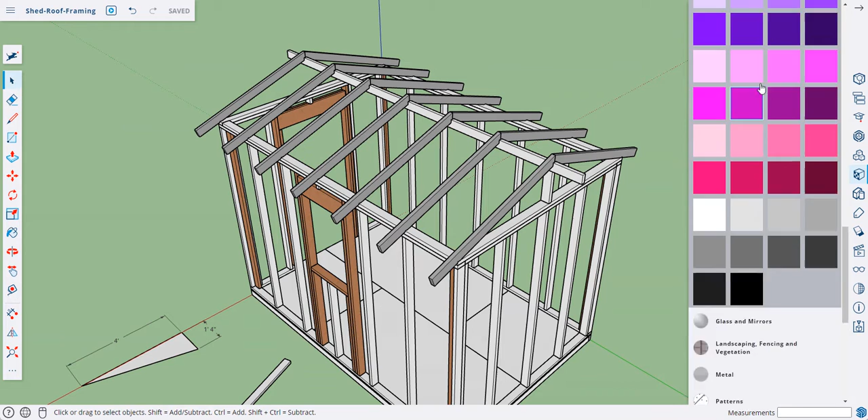Let's just close this color box here, and let's do a fascia board on the sides first. Fascia boards are usually put in horizontal and vertical on here.

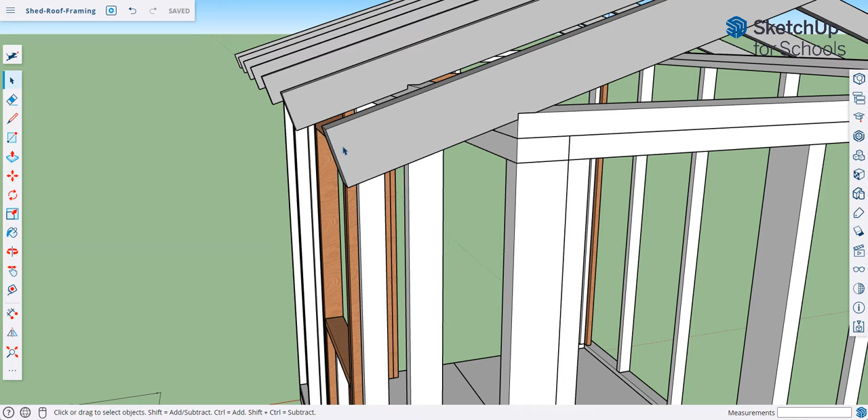So we're going to trim this rafter, and I don't need to trim all of them, just one of them. I'm going to select this and edit the component, and then edit a group first, then edit the component. Then you can see when I change this, everything else here will change.

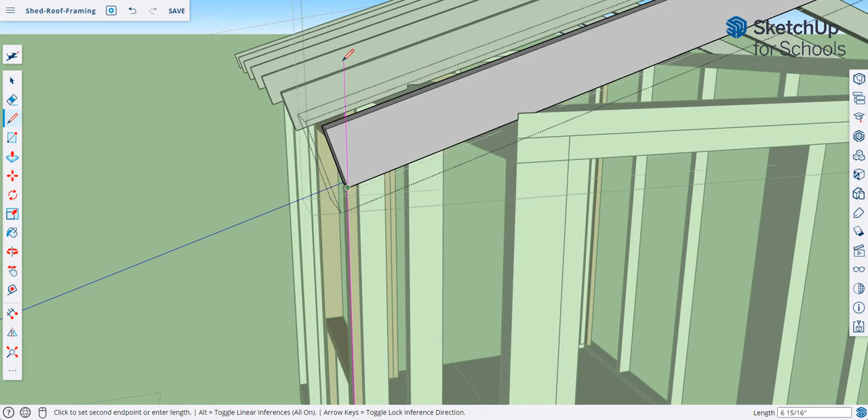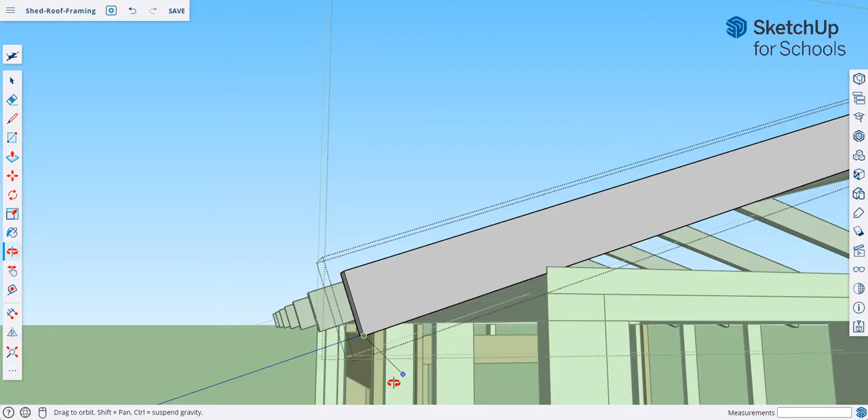So what we're going to do is draw a line from here going up on the blue. Let's see the blue axis. You can also accept parallel, but we really want the blue axis to appear. If you don't get the blue axis, parallel on the edge would be fine. You can get the blue axis if we go and look at the sky, I guess. Blue parallel. It's a little bit difficult when you can't. There you go, we want to just parallel to the stud.

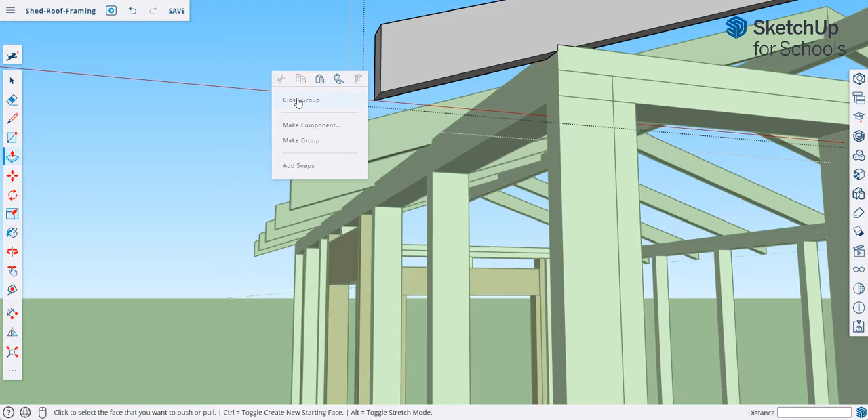Press your shift key and then go up until you touch the edge. So I drew a line here, and then all of these copies also had a line. We're now ready to push this up, and you can see everything else was trimmed out. I'm going to close the component, then close the group.

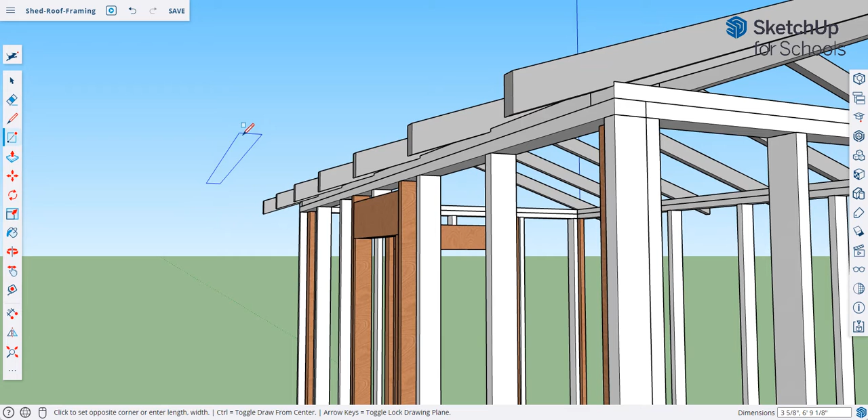Now we're going to add your fascia board, and it's not a 2x4. It's really a small piece of thin board, so we can just draw it up here in the sky, as long as it's on the green axis. If you can't do the green axis, you can probably do it here on the side, like that.

So we're going to do 0.75, so it's not even an inch thick, by comma 7.5. So it's really a 1 by 8. Okay, so that's a 1 by 8, 0.75 by 7.5.

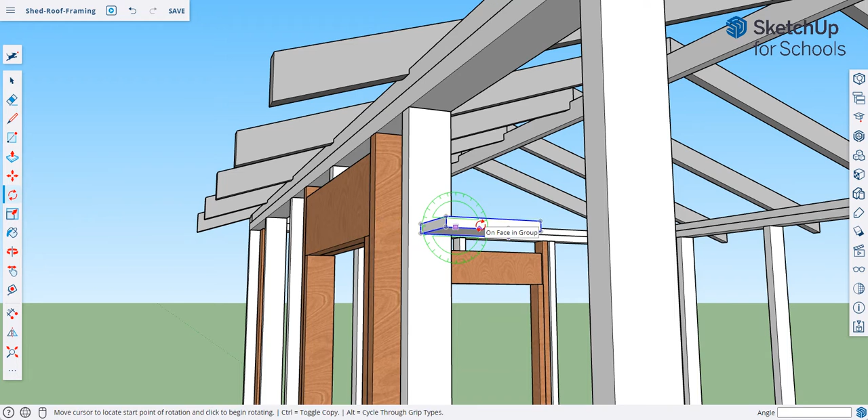Press enter. It doesn't matter that it's sloping down, we're going to just make a group out of it later. Then triple click and make it into a group, not a component, but a group. And we're going to rotate that, making sure it's rotating on the green, so it's vertical.

And then we're going to move this from this corner. We can just move it here for the meantime. There you go. And then we're going to extend that from this edge to this edge. So let's just edit the group again.

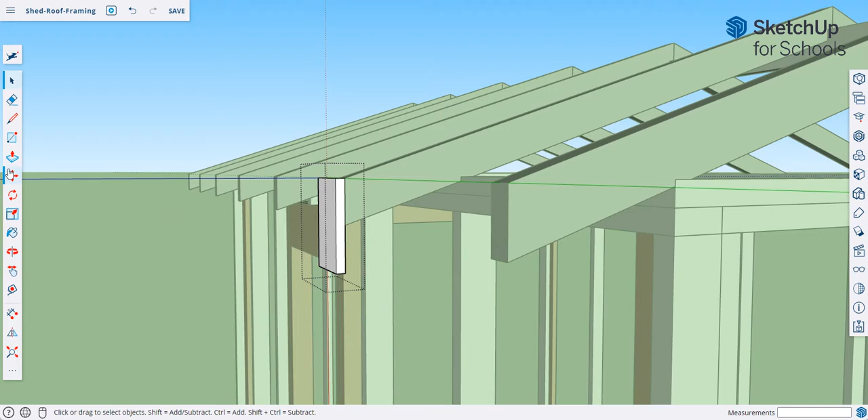And we're going to extend that up to here, and also onto this other side up to here. Now we're going to also extend that here, but we're going to create blocks first. So that's the fascia board on the right side, I guess.

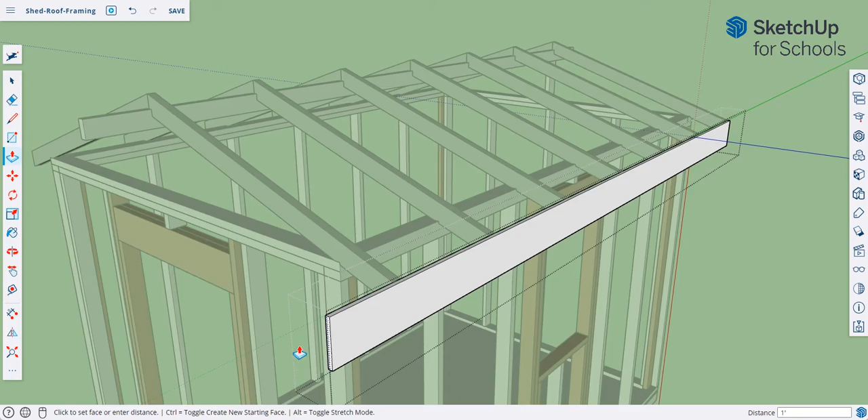Before we can continue, we are going to extend this 12 more inches. So extend that and then type in 1 2 on your keyboard, and we're going to do the same thing on the back. We're going to click this and extend that 12 inches. There you go. Okay, and then we're going to close the group.

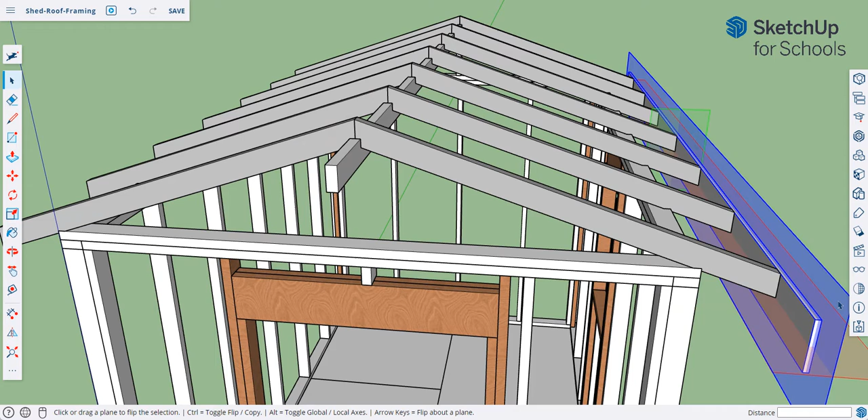We're going to use mirror, so we have one on the left and right. We can select the midpoint here, but we want to drag this blue all the way to the middle here, so that we would have the same copy here on the left. Make sure you press Control so you don't lose your original. Right click, just select. Now that's the side fascia.

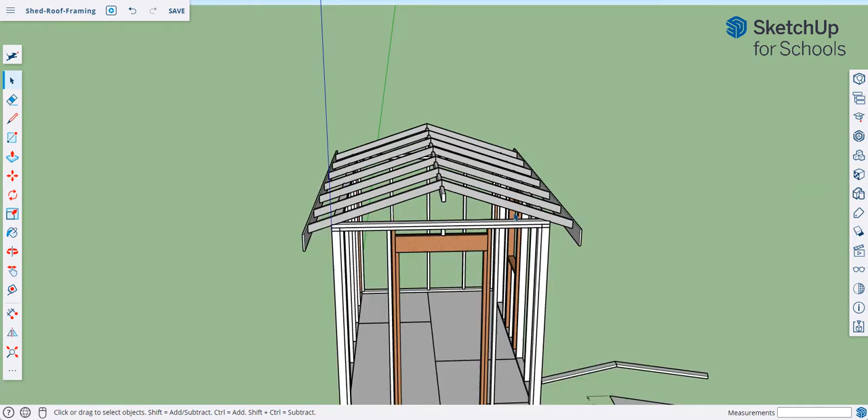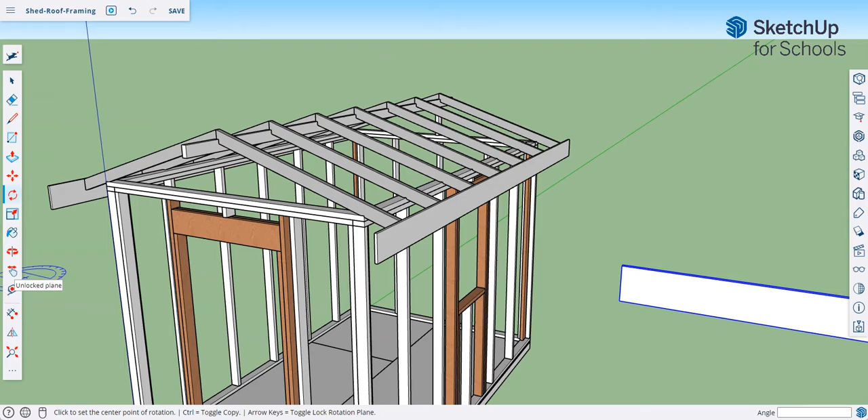We're going to now do the front fascia boards, using the same board. So we can just make a new one, or just copy this. We're just going to copy it, and rotate that so it rotated on the top like this, making sure it's now parallel.

And then we're going to move that and put that on the very, very top of our front board here. Okay, and we put that there first so that we can match the angle, because we're going to do another rotation.

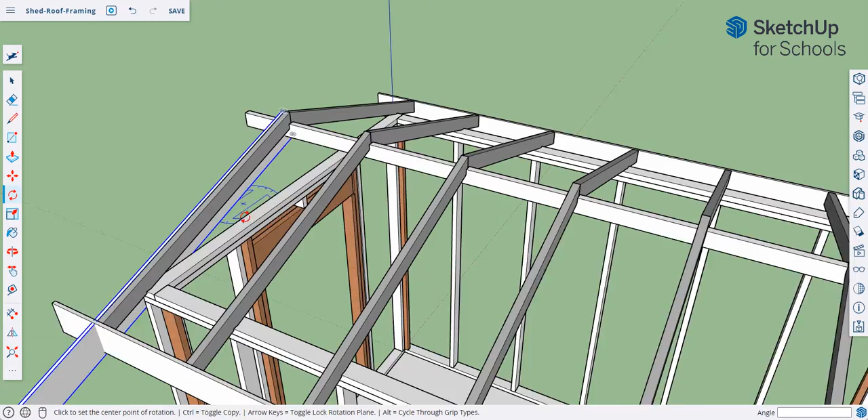So we're going to do a rotate. We're going to click on the face here and hold our shift key down so we can touch that corner. Then we can click any edge and drag it down until you touch the edge of your rafter. Okay, so that's too long, but we're going to make it shorter.

Now we're ready to move that on the very, very front over here. So we're going to move it. Let's look at it from this side. We're going to move it from this face and align that to this face.

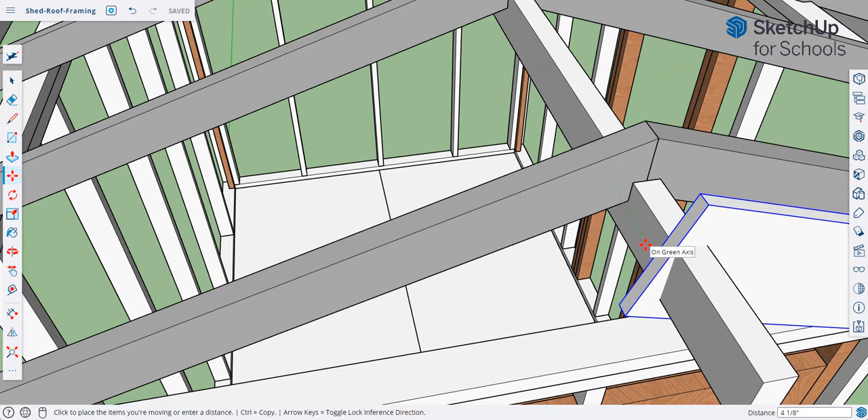So while it's on the green, hold the shift key so it doesn't move left and right, and simply touch the face here. It's really hard to see, but we want to touch it on this edge here like this and then click that.

And that's now touching. If it's not, then you can just move it on the green axis again. Hold it and then touch it on the edge here.

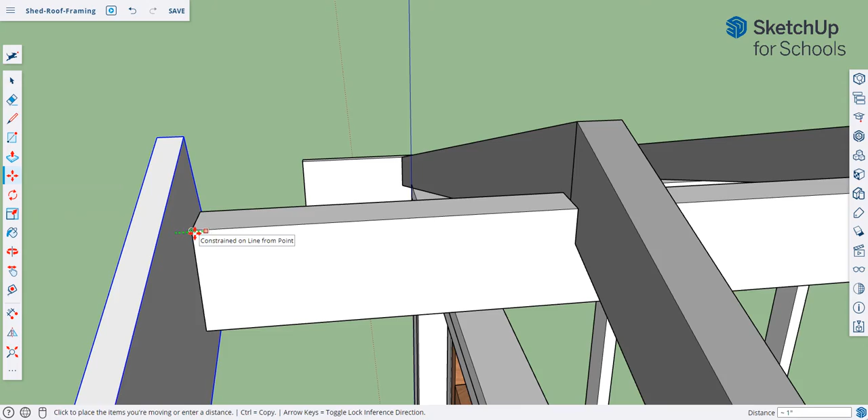There you go. Now we want to cut it also vertical, so we're going to edit the group and draw a blue axis line. You can always press your shift key so it just locks it into that axis.

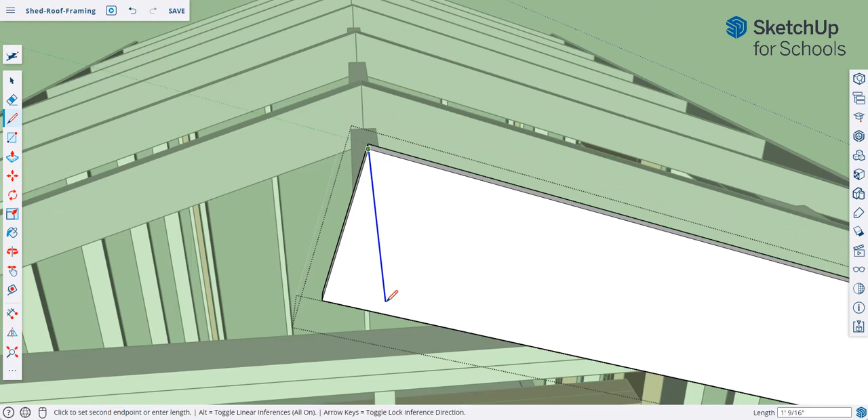And then inspect that. Oh, it didn't - that was the wrong line. So make sure you always inspect. I'm going to erase and then draw the line now.

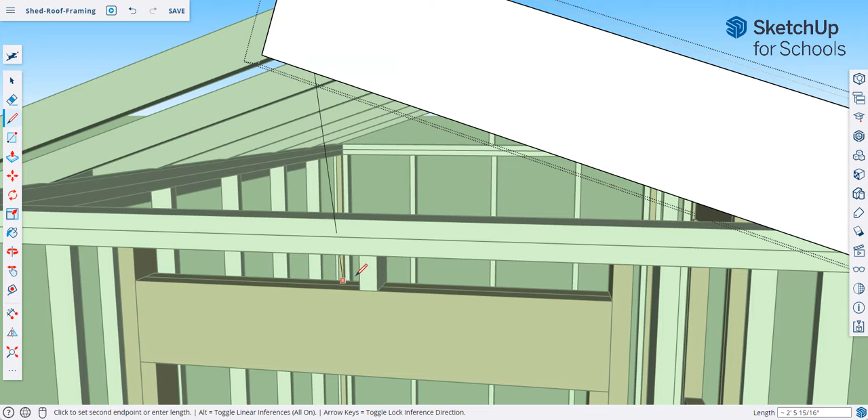Somehow it's not working, let's use something that's parallel to it. So we're going to look at this face in here. You want to do a parallel.

There you go. You want to do a purple line, hold your shift key and then until you touch the edge. There you go. Okay, and then push all the way back until it's removed.

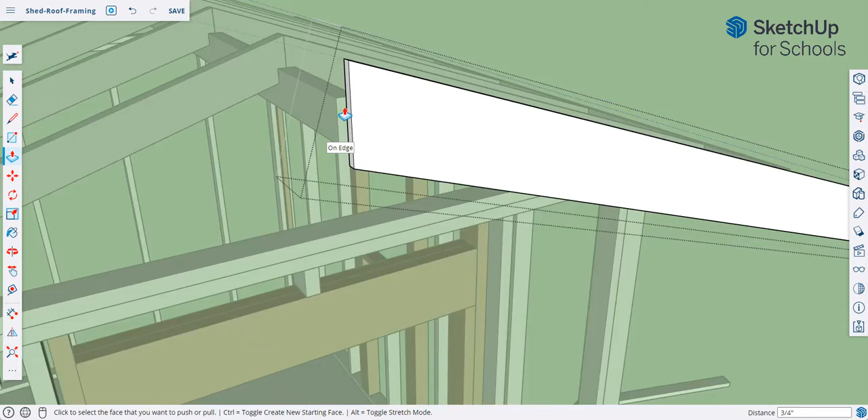And then we're going to also shorten this by pressing the very edge until it's up to the corner here.

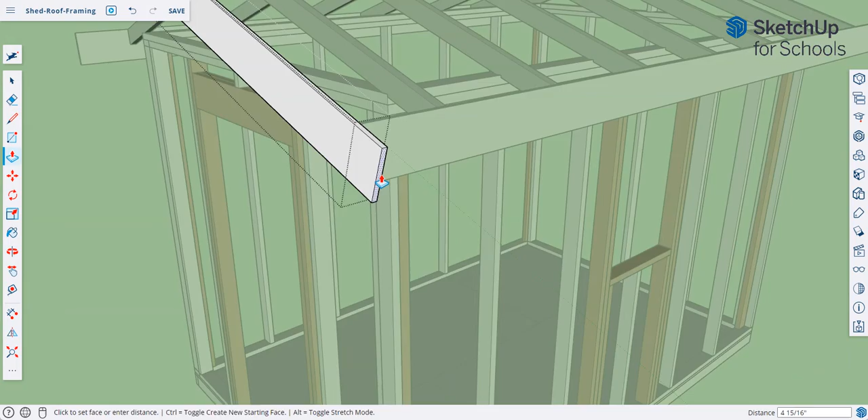Now we don't want it like that, so we're going to extend it just by a little bit, sort of from behind. We can cut this by drawing a line.

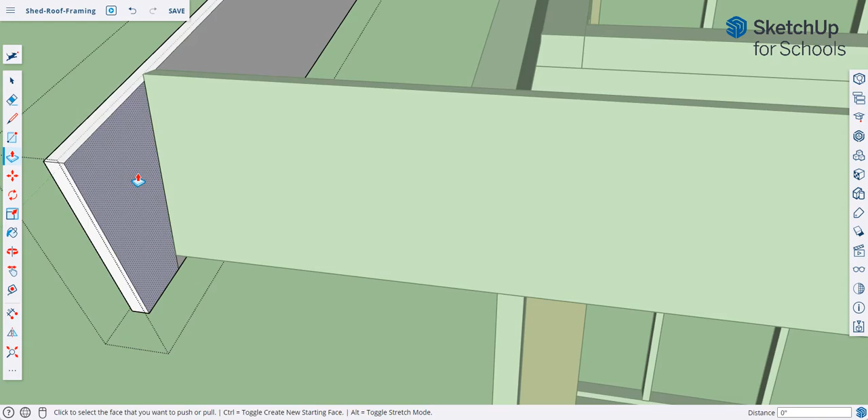And then going just straight, and then hold your shift key until you can touch the edge. And then use your push/pull and cut it out. Okay.

Then one last piece here is we're going to mirror this. So let's close the group and then do a mirror. Select this and do your mirror. And we want to just mirror it on this face.

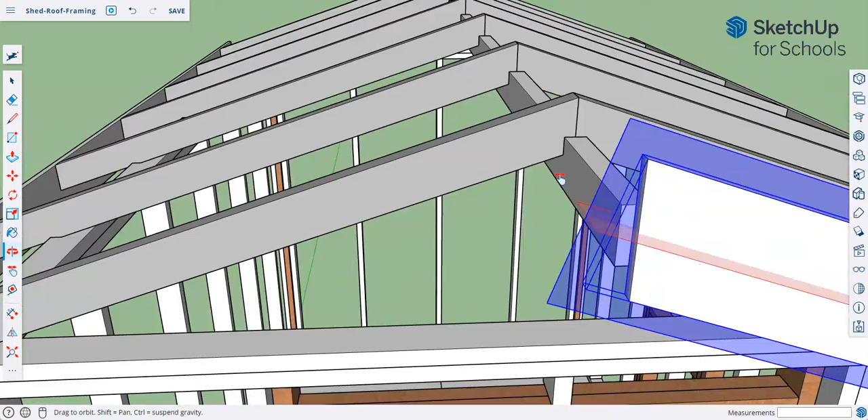So make sure that we can touch the face here and then press Control so you don't delete your original one. Right click and select anywhere. So we're done with that piece.

We want to put it in the back, but we're going to just add blocking. Also, at the same time, you can see this one sticks out by a little bit. Okay, you can lower this fascia board just by a little bit.

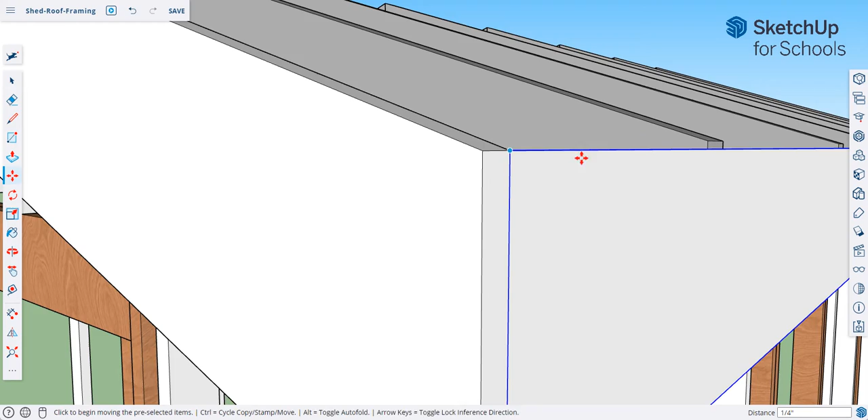And it's okay that you're exposing your rafters, but it's important that the fascias fit. We're going to do the same thing on this other side. We're going to lower this by a little bit.

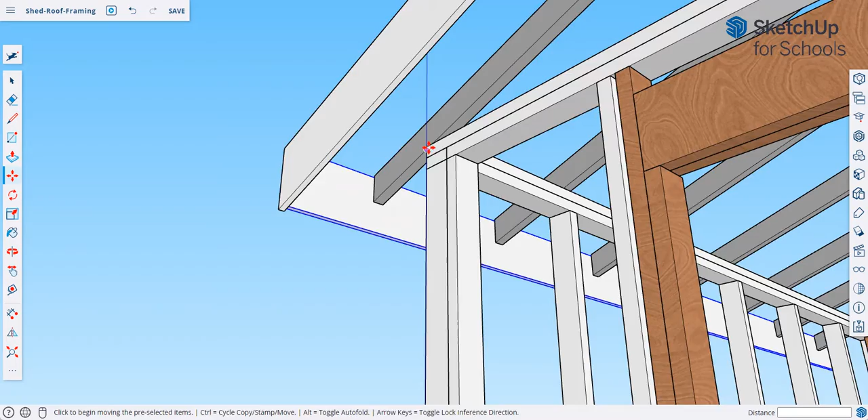And then we just want to support this fascia by adding a blocking here. So to add a blocking, all we're going to do is from the underside - we may want to add one here and another one here.

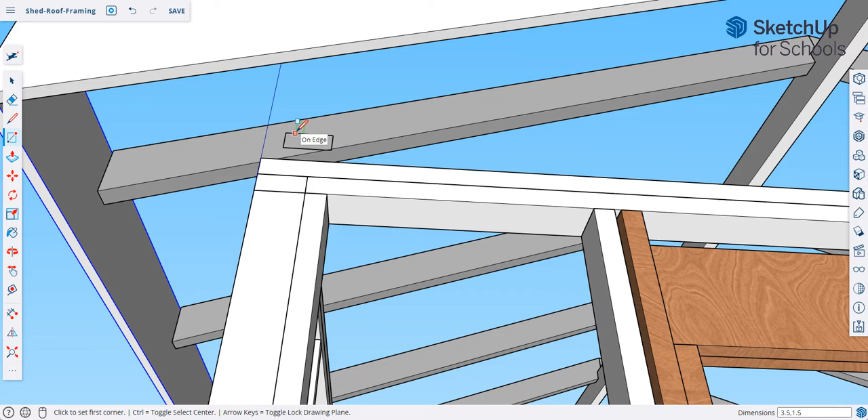So what we're going to do is just simply do a rectangle, and this time let's type in 3.5 comma 1.5 and see whether it's standing up. No, it doesn't. So anyway, we'll push/pull it until it touches this edge and then triple click it, 1, 2, 3.

And then make it a group. Okay, and then we're going to do a rotate.

Hold it on the face of this rafter, press your shift key, point it to the corner, and then touch the other corner, and then rotate it so it's vertical.

Okay, and then we're going to move that down here like this to this corner. Okay.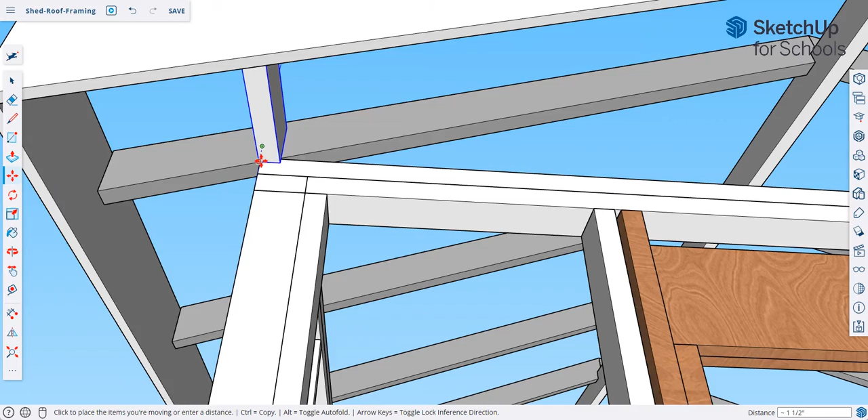Sometimes it sticks out like this. So what you need to do is rotate it so that it's perpendicular to the board. Okay, so to do that, we're going to do another rotate. Point to the face of the rafter. Hold your shift key. Click on this corner, click on that top corner, and then basically point to the edge, and then it should automatically say perpendicular.

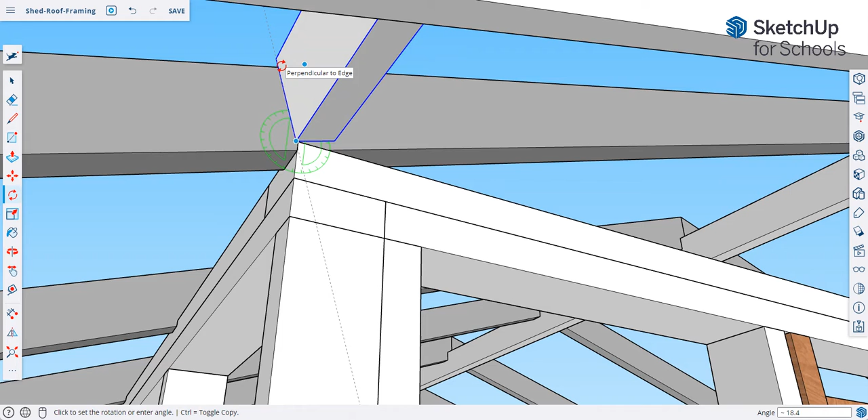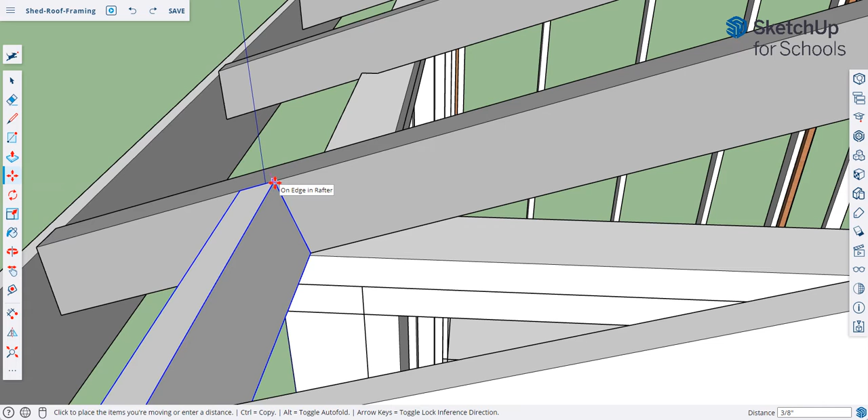So simply click that. Okay, and then we're going to just bring it down until it's touching, or you can do it from the top. Move and then bring it down from this to, oh, undo, from here, and then you want to do the purple on the edge of the rafter. So that's the color purple there. So just simply click it, and when it's purple, click. Okay, that's an autosave feature.

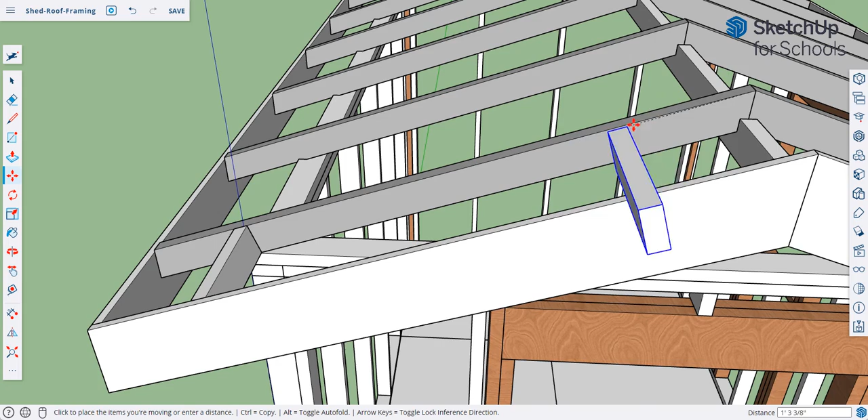But anyway, then we're going to put a copy here, and we want it to be 24 inches away from here. So we're going to make a copy, click this and put that here. And once you have the copy, select that and move it on the edge. So make sure you can touch the edge. You may need to rotate your view until you can touch the edge, and then while it's on the edge, type in 24 and press enter. There you go. Okay, that's what you want.

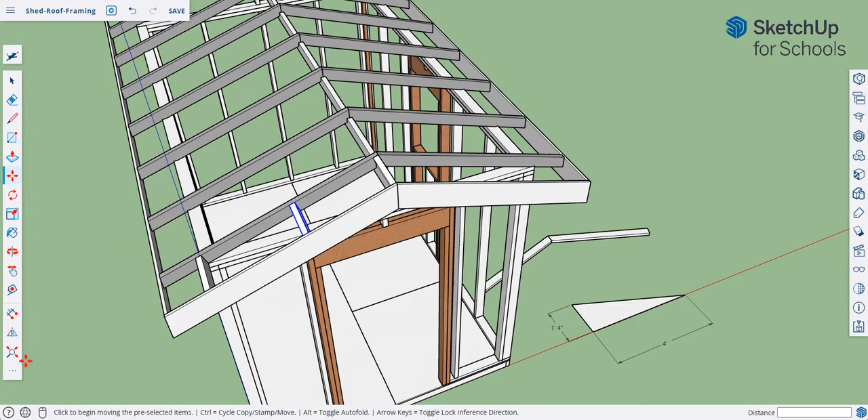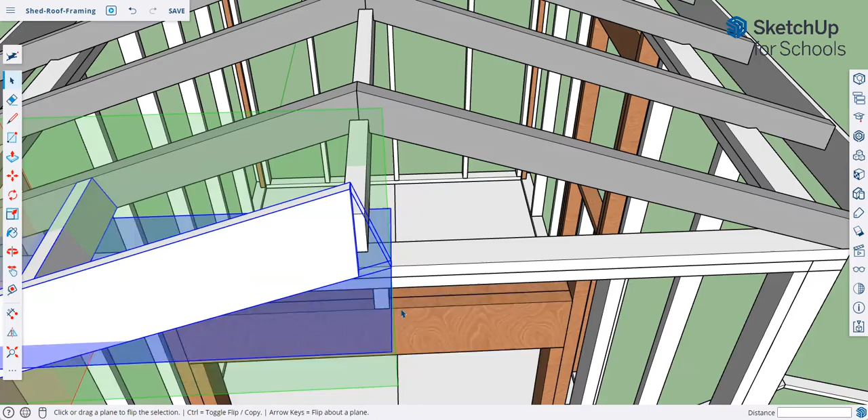And then all we have to do is mirror this on this side. So we're going to select mirror, and we're going to mirror that on this edge here. Can't select the edge here. You know what? I'm going to simply erase this first. And then, oh, we have an extra piece, so we're going to delete that. And then we're going to mirror this and this one too at the same time. And then touch the face of this board here, and press Control so you don't delete the other one.

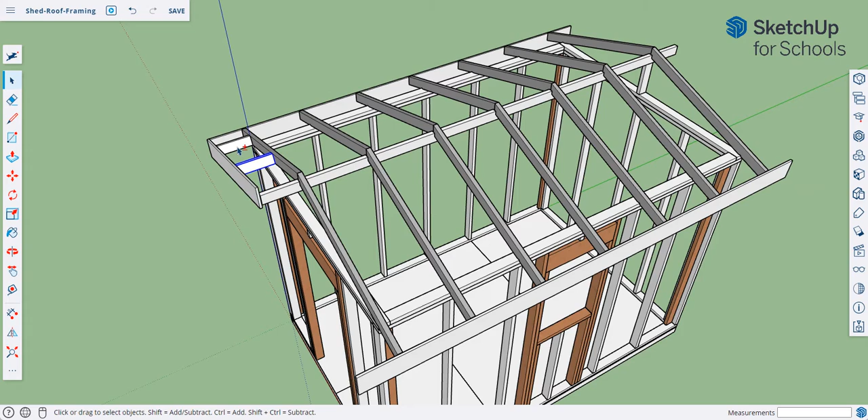So the front is done. We just have to mirror this from behind. Okay, so we're going to select, oh, we didn't mirror this. We forgot to mirror this. So let's repeat that mirror. We're going to mirror this, press Shift key and add this, and then the fascia board. Do your flip, which is mirror, then select this face, press Control, and there you go. Now all of this should be mirrored from this side.

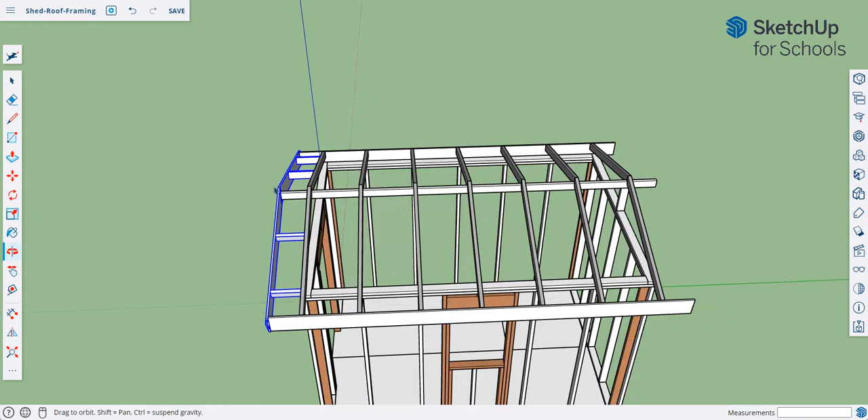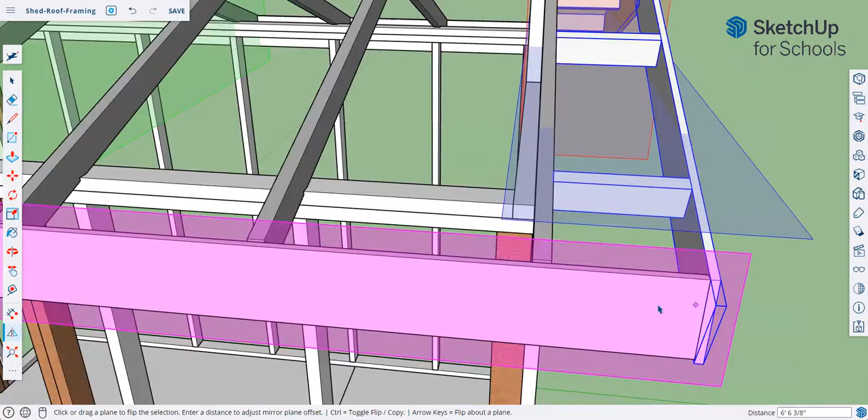So we're going to select this, Shift, and add. Oh, we don't want this. We're going to add these and the fascia. So all of these highlighted ones we want to mirror on this side. So we're going to flip and then use the midpoint, drag the green onto the middle of the board here. Let's find the middle of the board. There you go, middle here. And it should be perfectly aligned. If not, you can just move it. But we are now done with our roofing. Oh, press Control to not remove the original. Okay, and that is now finished.

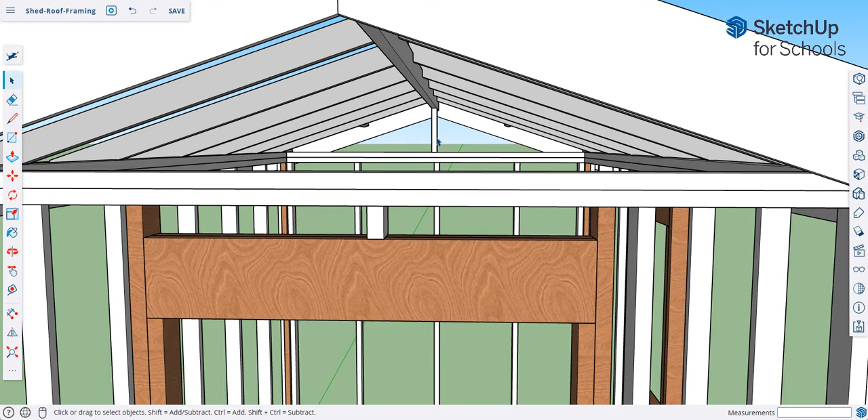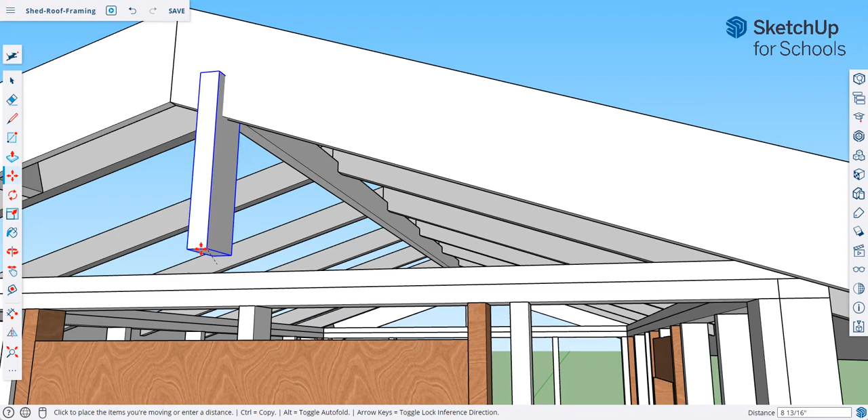We just have to delete all of these extra pieces here, and that's the complete frame. Oh, we're missing this piece here. This one needs to be copied here, so we're just going to do a copy, select this and put that. You have to look at the underside, and we're going to just copy it. And if you got it over, simply from the corner here, bring it back. Make sure it's on the green, and then bring it back until you touch the edge.

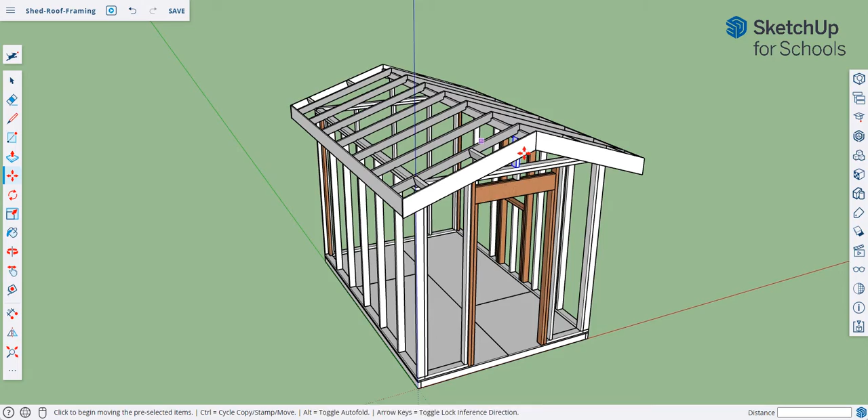There you go. Okay. There's some more blocking that you need to put here, but we'll leave it at that. And that's basically a complete frame, missing the blocking for the plywood finish. So we're not going to put plywood. Typically they put plywood on top and plywood on the sides, but we're only going to do the framing for engineering purposes. Okay.